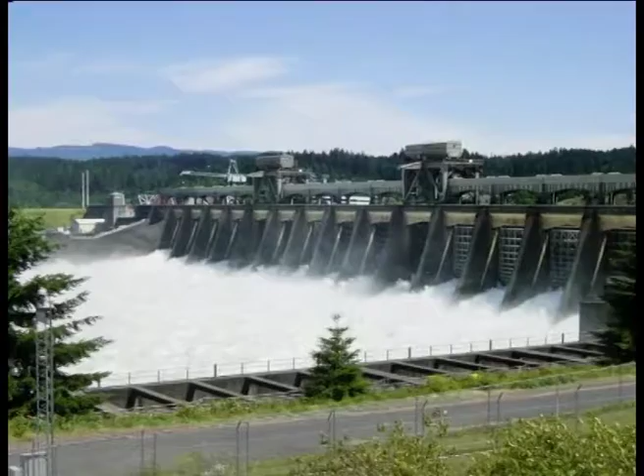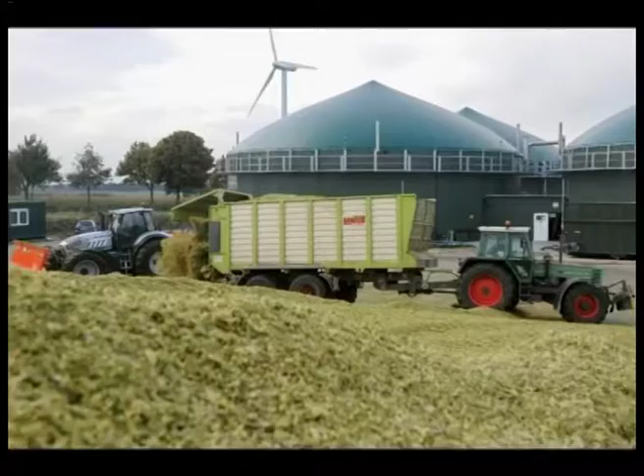The renewable sources are those which will be available for our human consumption again and again. The energy derived from water as hydroelectric power, sun as solar energy and wind energy are the renewable energy sources. It also includes now the bioenergy sources today.

The non-renewable energy sources are those which are permanently consumed for generating energy and need further supply. Fossil fuels like coal, oil and gas, fissionable materials for nuclear power generation, and geothermal energy sources come under this category. Natural energy sources and resources are very important aspects to be studied.

In this lesson, the kinds of natural energy resources used by us are going to be seen. The energy resources are classified into the following five categories: energy from fossil fuels, energy from sun and wind, energy from water, energy from biomass, and energy from nuclear and other sources.

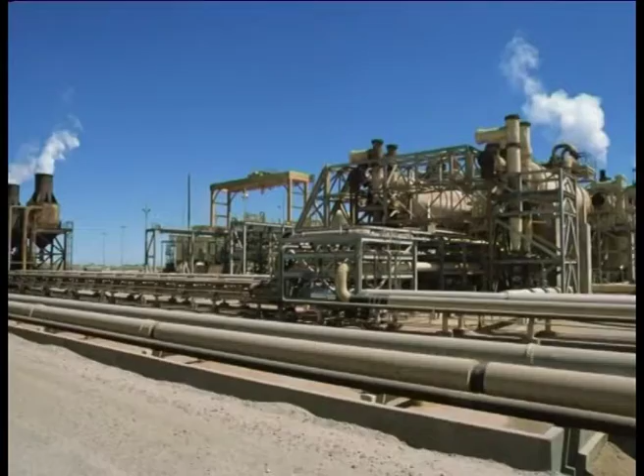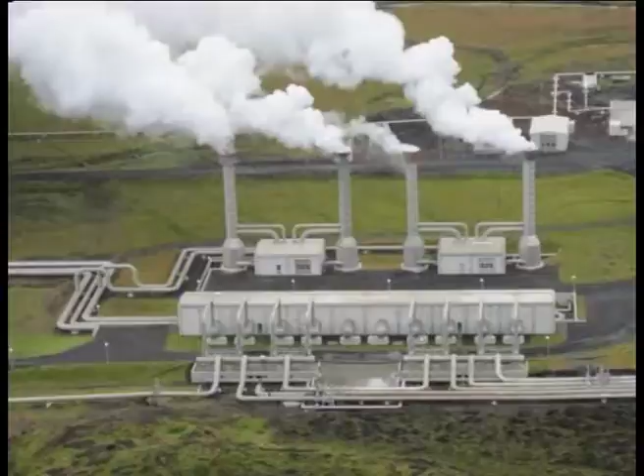If we look at the global energy consumption, 37% of the energy is consumed from petroleum resources, 24% is derived from natural gas, 20.9% is derived from coal, 8.8% is derived from uranium, 4.1% is derived from biomass, 2.8% is derived from hydropower, 0.4% is derived from geothermal sources, 0.7% is derived from wind, and only 0.1% is derived from solar and other sources.

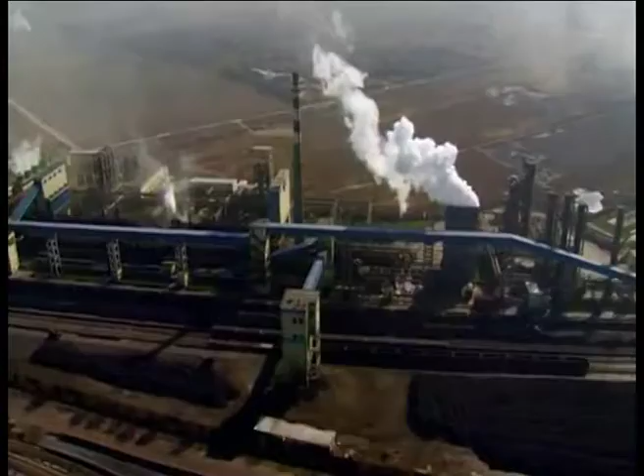Almost 91.7% is obtained through non-renewable sources and only 8.3% is derived from renewable energy sources.

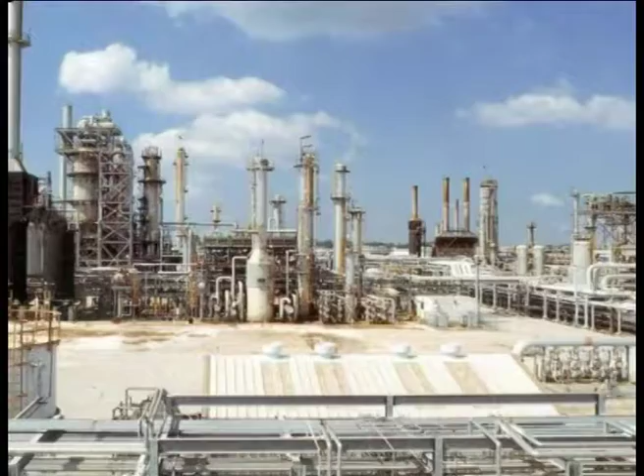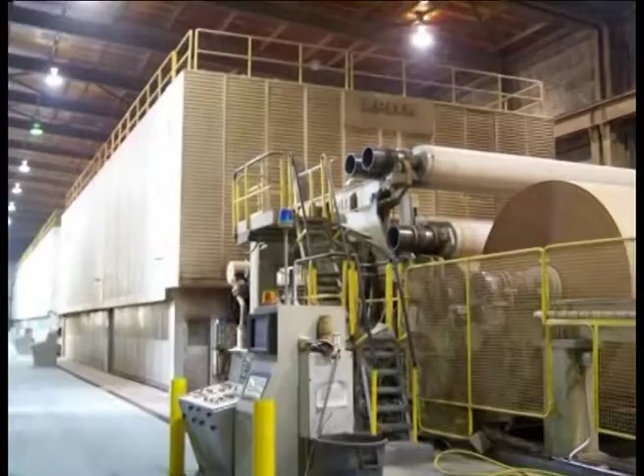If we see the energy used by type of industry, almost 32% is used in petroleum refining industries, 24% is consumed by chemical industries, 11% is used by paper industries, 8% is used by metal industries, and all other industries put together use about 25% of the energy in the world.

The energy resources derived from coal, oil and natural gas are considered energy from fossil fuels because they have been explored from the fossilized remains of prehistoric plants and animals. Coal is an altered residue of plants and trees of older forests which have been buried under sediments, and they are subjected to a set of geological processes and transformations.

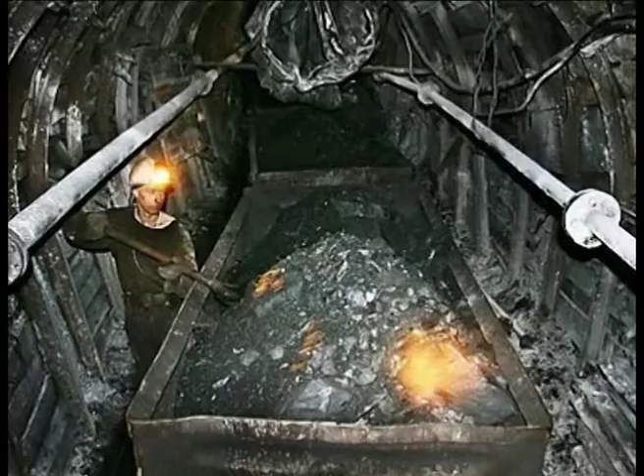Coal is burned to create heat to turn water into steam. The steam is then used to rotate the turbines which will rotate the dynamos to generate electricity. It is also converted into another usable form of energy called coke, a charcoal-like solid which is essentially used as a raw material in the production of iron and steel industries. Coal occurs in sedimentary basins as coal seams or layers.

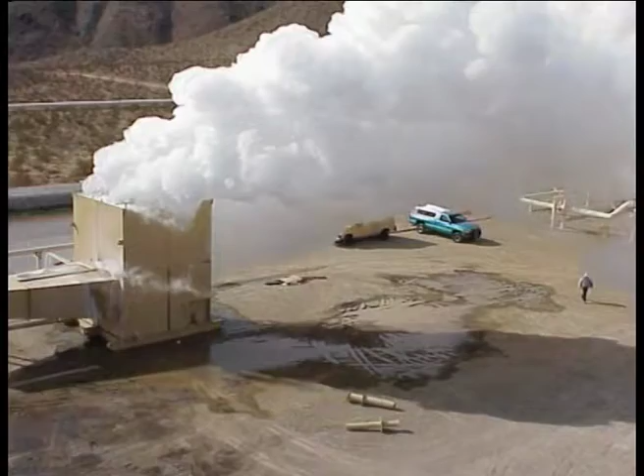Coal is mainly used in thermal power plants. The production of thermal energy depends on the ash content of the coal used. Higher the ash content, lower the efficiency of the boilers and furnaces. The use of coal also generates solid waste and ashes. For every megawatt of energy produced by a thermal plant, about 1 acre of land is needed to dump the wastes.

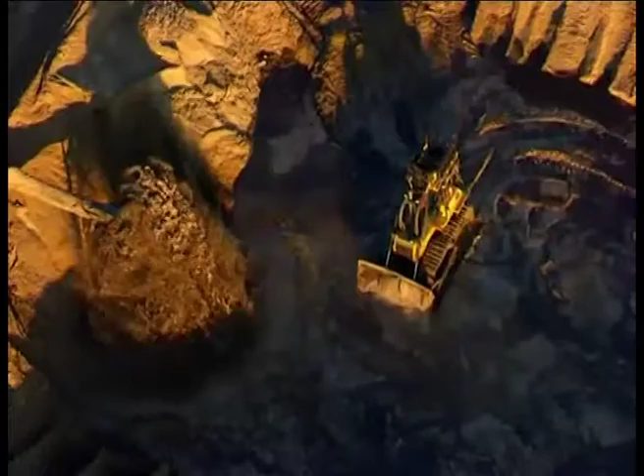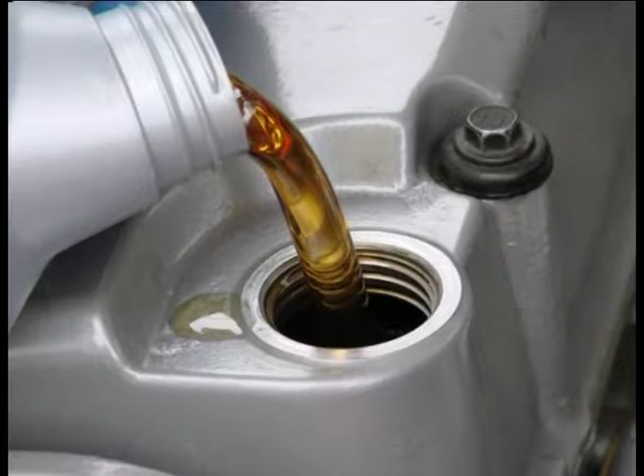Coal-based thermal plants pollute the atmosphere by gaseous emissions of sulfur dioxide and nitrogen oxide. They also produce tremendous amounts of solid waste, fly ash and bottom ash. Coal is a non-renewable form of energy, the use of which is to be done very economically. The next major source of energy is derived from oil. The oil that is derived from rocks is called rock oil or petroleum.

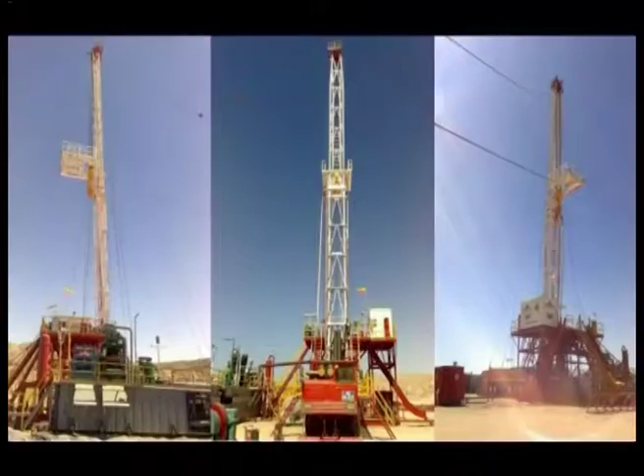Petro means rock, oleum means oil. Petroleum furnishes about 40% of the commercial energy used in the world. It provides most of the energy used for transportation and other activities of the population. In general, petroleum and natural gas are hydrocarbons.

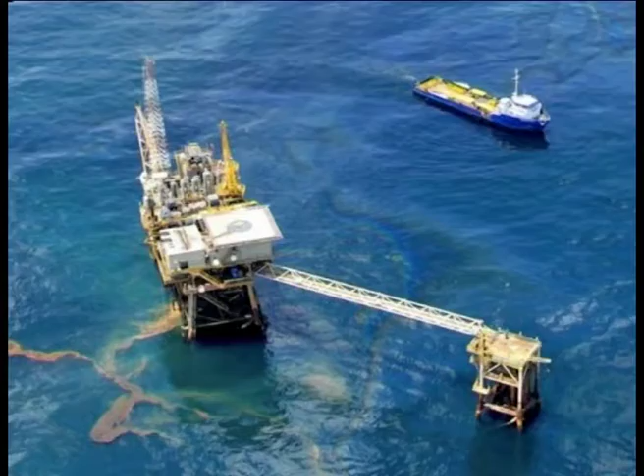They are fossil fuels formed from organic materials that escaped complete decomposition after burial. Petroleum is a complex mixture of hydrocarbons containing nitrogen, sulfur and oxygen. The major source for oil and gas is the fine grained, organic rich sediments buried to a depth of 500 meters or below the stagnant oceanic waters. Like coal, oil also contains some impurities that can cause air pollution, but refineries can remove many of these pollutants when they process the petroleum.

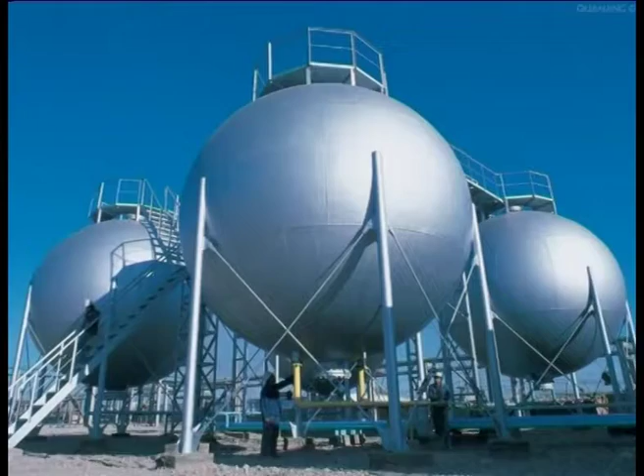Natural gas is the most convenient fossil fuel. It causes little or no air pollution. Natural gas is a clean source of energy because it is refined naturally during its formation within the earth and does not require further refining. In addition, it can be compressed into a liquid and transported long distances through pipelines. Natural gas is used for domestic and industrial applications.

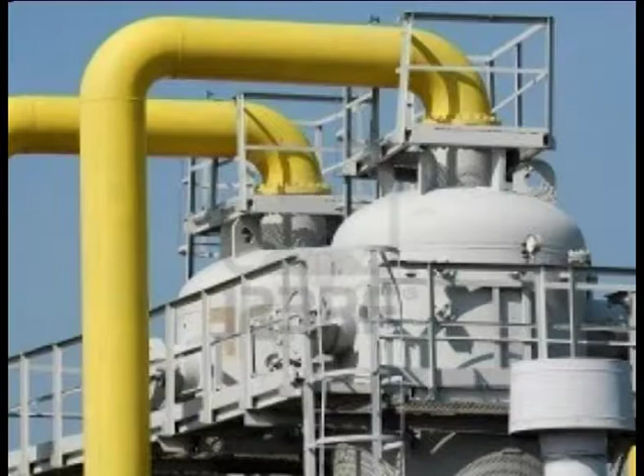The consumption rating for different sectors of natural gas are: for manufacturing fertilizers about 36% is used, for power generation about 27% is used, for industrial sectors about 8% is used, and for the extraction of liquefied petroleum gas or cooking gas, the rest is used.

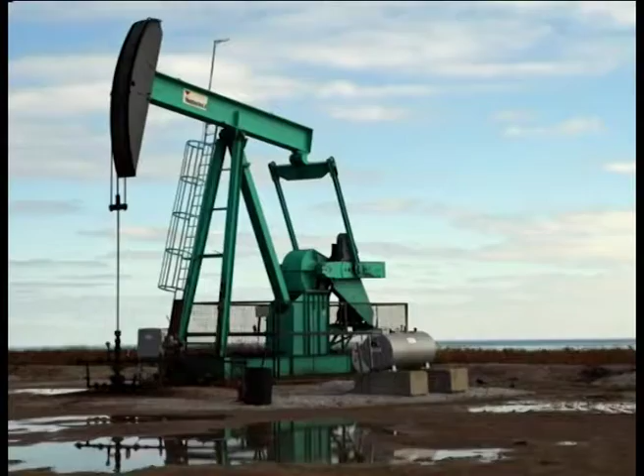India has significant amounts of oil and natural gas resources. There are few revenue generating companies in the oil and natural gas productions in India.

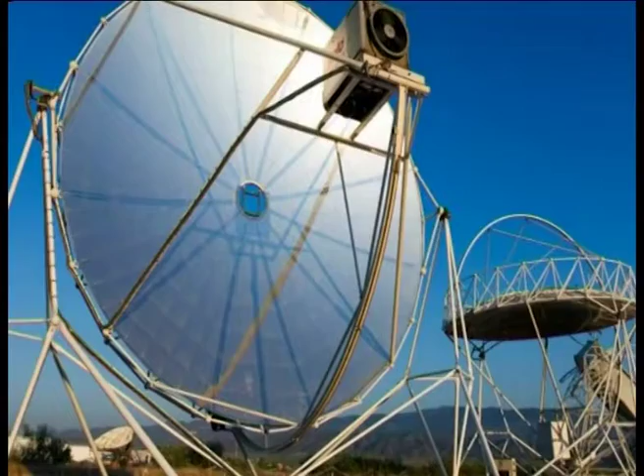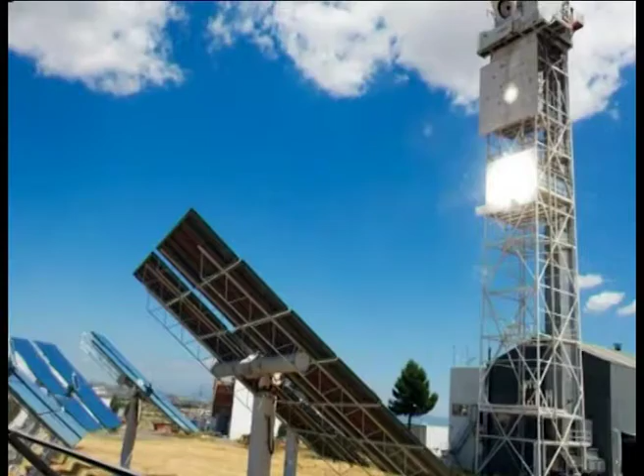The energy received from the sun's electromagnetic radiation is called solar energy. It is also used to produce electric power. This is a non-conventional and renewable energy source. Solar power is one of the cleanest forms of energy. It does not generate any greenhouse gases or other pollutants.

It uses no water and produces no waste. It does not contribute to global climatic issues. Solar power will become an important part of our energy for the future.

There are two methods through which sunlight can be converted into electrical power: by using photovoltaic conversion or solar thermal conversion. There are also many ways to convert the sun's energy into heat and electricity.

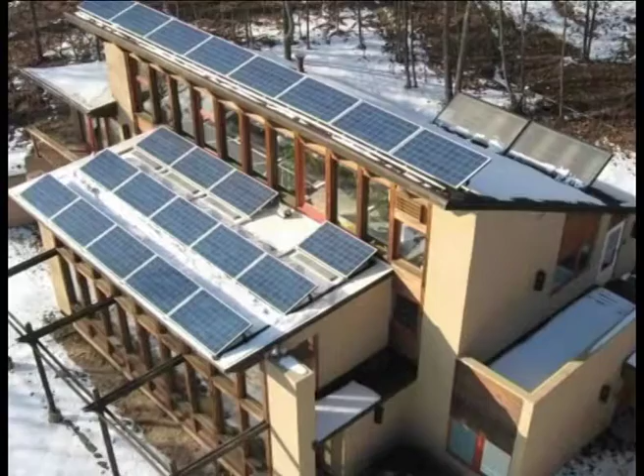Passive solar energy is one type. This type uses sunlight for energy without the use of active mechanical systems. It ensures that buildings make the most use of the sun's radiation to regulate both light and temperature requirements.

Solar thermal collectors are the second type. This uses the solar radiation falling on them to heat the tap water. They can also serve for space heating.

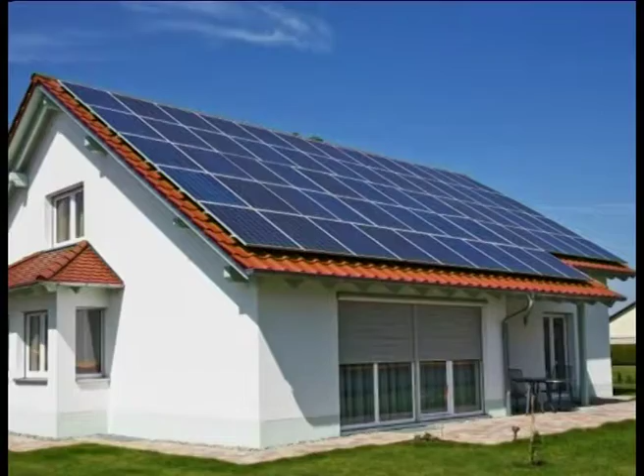Different types of photovoltaic modules are used to convert the solar radiation directly into electricity. Such modules are now used in buildings, especially on the rooftops. They are also used as roof tiles.

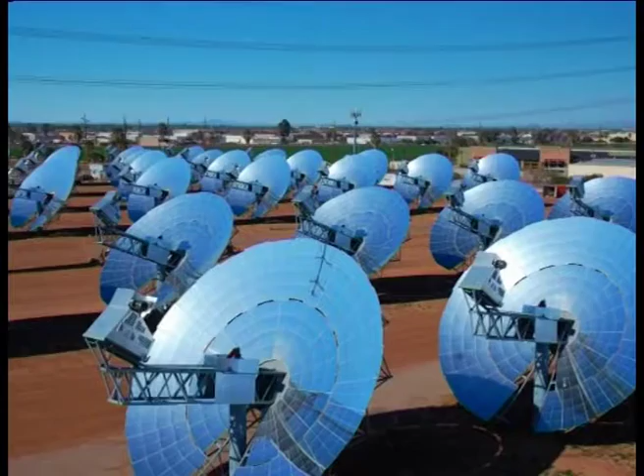Different types of solar thermal power plants are also using solar heat by concentrating the solar radiation. They use mirrors which focus on the solar power tower or by means of parabolic troughs, and heat the water and convey the steam to a turbine which can generate power.

In some places, a simple mirror based system is used to save gas, kerosene or wood through solar cooking. It is reported that the solar energy falling on the earth every 29 seconds is equivalent to the human energy requirement for the entire day. That is a very important point to be noted by us.

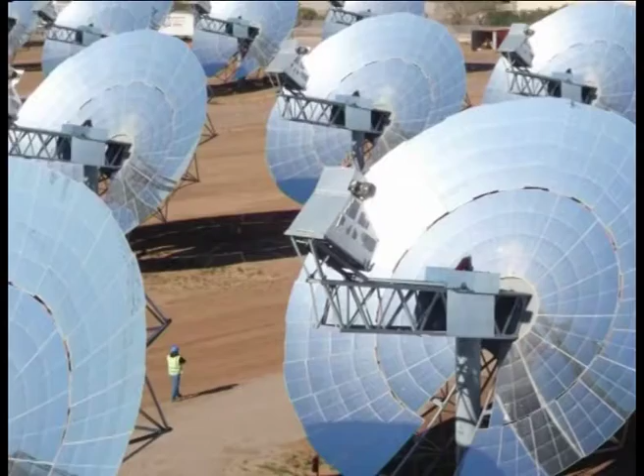Solar energy comes from the sun and it is plentiful, but the distribution is very sparse. It must be collected and concentrated to produce usable power. This requires some special devices. Hence, harnessing of solar energy is an expensive affair.

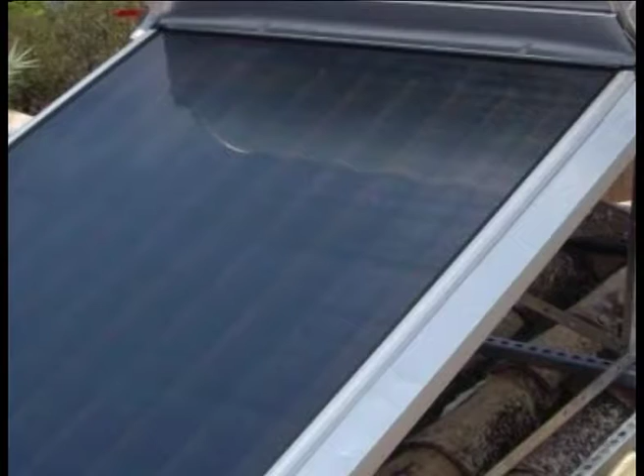A typical solar water heater consists of a coil of copper pipe brazed to a blackened metal base. This assembly is covered by a transparent glass plate or a plastic sheet. The water which is passed through the coil gets heated up by the radiation. A very high amount of heat is trapped in this process during summer months.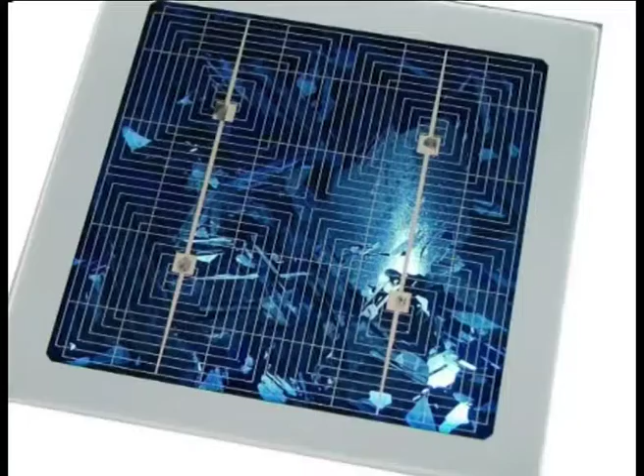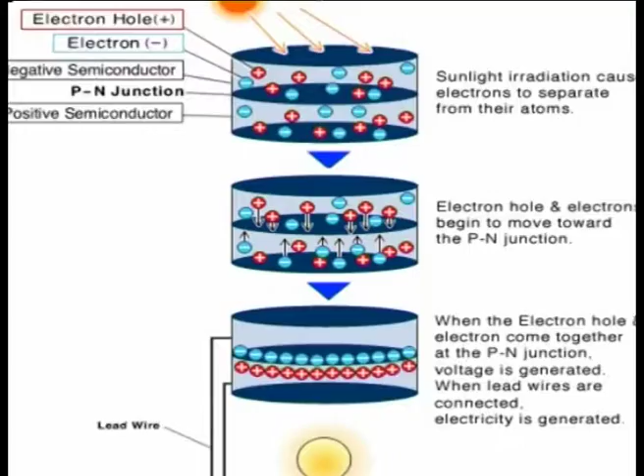Solar energy is also caught to provide power using solar cells. Solar cells are devices made from crystals of silicon to produce electricity from sunlight. They are called photovoltaic cells.

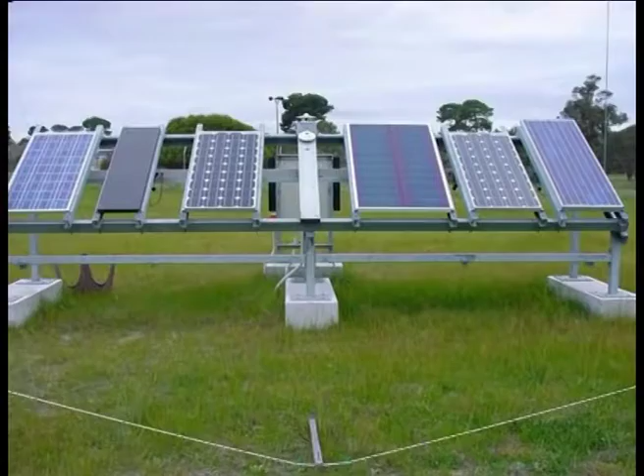Research continues on the application of solar energy for pumping up water, use of solar energy for refrigeration, use of solar ponds, and temperature control in buildings.

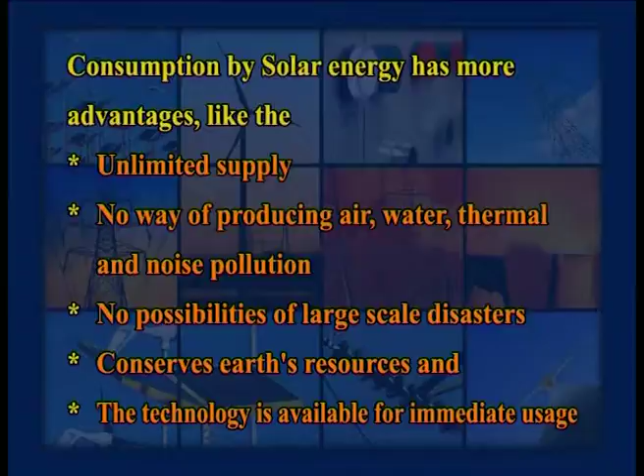Consumption of solar energy has many more advantages, like unlimited power supply will be available, no way of producing air, water, thermal and noise pollution, no possibilities of large scale disasters in solar energy. It conserves earth's resources and the technology is available for immediate usage. The major disadvantage is the expenditure involved in establishing the photovoltaic plants.

Solar cells are also very expensive. They cannot be completely used to replace the conventional fuels in some places or in some processes.

Next comes wind energy. The global wind energy potential is also very huge. It can be harvested everywhere. We get a good flow of wind in the valleys, on the mountains, at or near the seas. In India, China, European Union and the United States of America, these are all the major wind energy producing countries in the world. The rapid depletion of fossil fuels and the increase in environmental pollution call for an efficient use of other energy sources and to identify alternative energy sources also.

Wind is a powerful agent for providing power. It is the best renewable energy source available on the earth. Wind energy can be harnessed very easily. The blow of wind is allowed to rotate the blades of a windmill which is coupled to a turbine. This drives the power generator to produce electricity.

There are some merits and demerits in using wind energy. The generation period is very low, that is only 5 months of a year we can produce wind energy. This is because of the seasonal availability of a reasonably useful wind. Power generation starts immediately after the commissioning of the plants. Power is cost free, generation is cheaper, but the recurring cost is also very less. The installation cost is very heavy. The maintenance of the machinery is also very expensive.

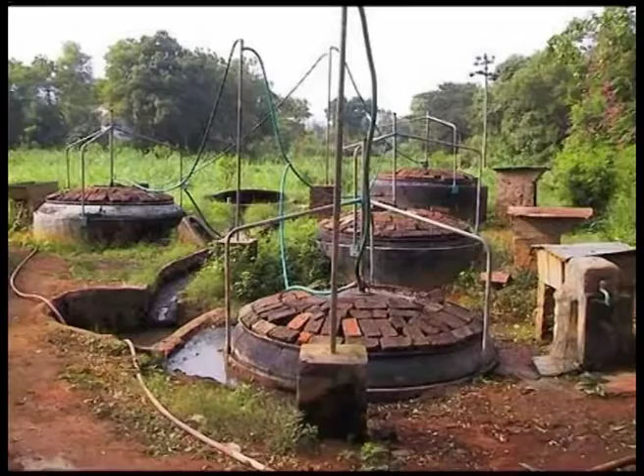Biogas is the methane gas produced or released from organic waste like sewage, garbage, manure or crop residues. These are decomposed substances in the absence of air. This is similar to natural gas in origin.

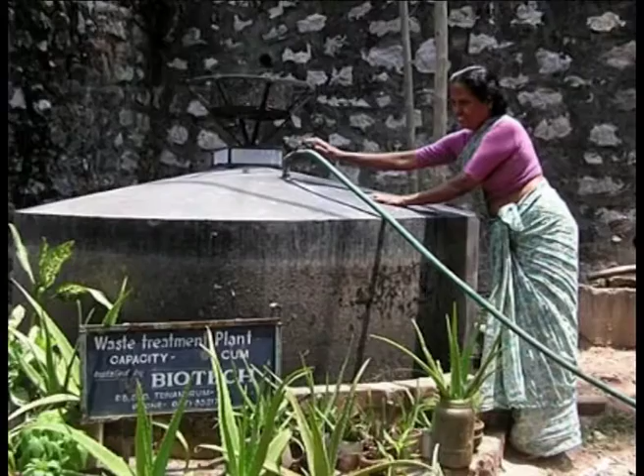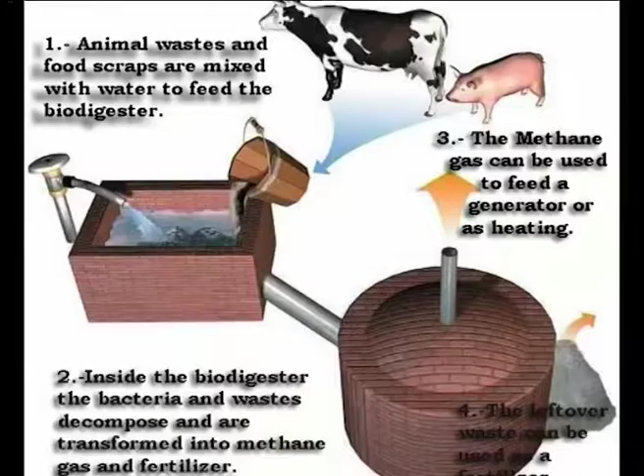Biogas can be collected using a container filled with the waste and closed at the top with a tap for trapping the gas. The wastes are mostly animal excreta or dung which are allowed to decay and decompose naturally inside the container. After producing the gas, the used up materials can be used as a high quality organic manure in the croplands or agricultural lands.

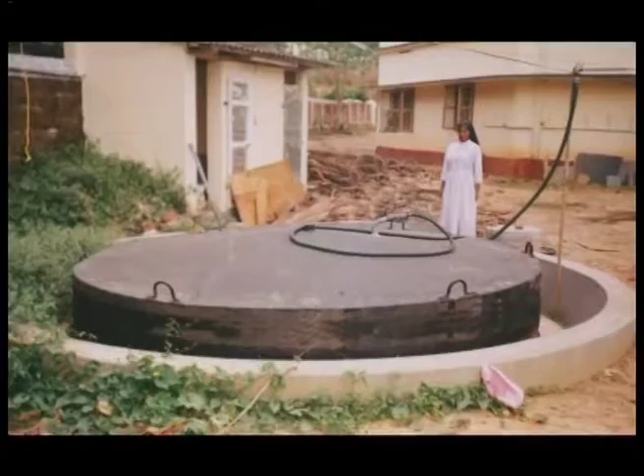Community biogas plants, industrial biogas plants, night soil biogas plants, family size biogas plants and improved chulas are some of the bioenergy sources employed and are under operational conditions in India and also in several other parts of the world.

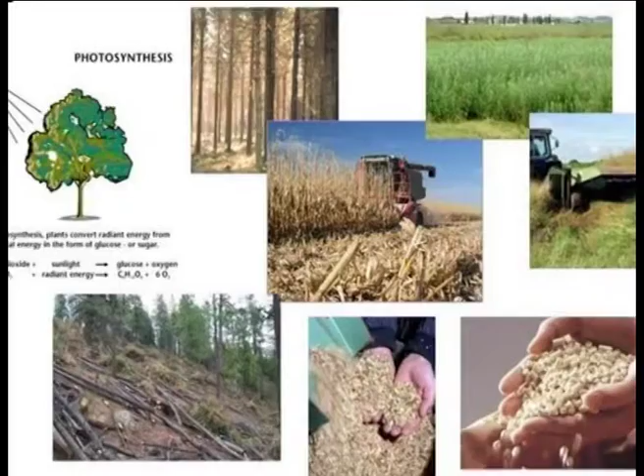Biomass fuel is the common name given to all forms of fuel generating organic remains. These organic matter can be burned directly or indirectly as fuel. A well-known popular biomass is the fuel wood. Wood was used as a major source of energy in several parts of the world for several centuries. Firewood is the best known biomass fuel. Cow dung or cattle dung is burnt for cooking purposes.

The distillation of biomass is done to produce alcohol for fuel. There are three major sources: forest products, unused agricultural products and urban waste. All of them can be used as biomass to produce fuel energy.

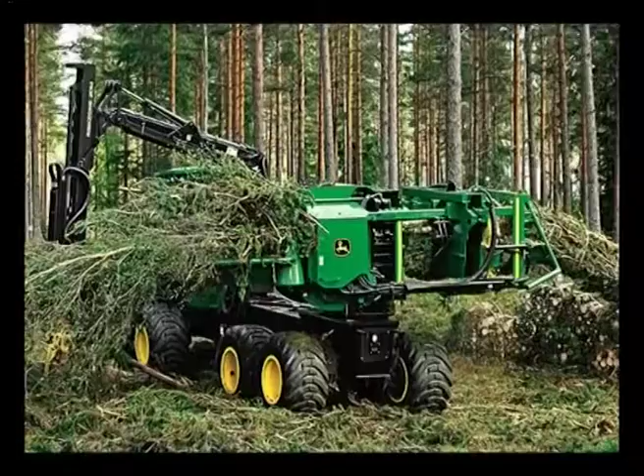The main advantage is that biomass under several conditions can be recycled. The main disadvantage is the requirement of energy for processing the biomass into a convenient form of energy, so one energy is required to produce another energy. Biomass energy is available locally, that is an advantage. Sugarcane farms and sugar production plants can use the straw and the dust to generate power. The main disadvantage is that the consumption of biomass fuel can produce air pollution, smokes, ashes and sometimes degrade the land areas.

Liquid biofuels are yet another major source of energy production. Ethanol and biodiesel are the major liquid biofuels. Ethanol is an alcohol fuel made from the sugars found in grains such as corn, sorghum and barley, potato skins, rice, sugarcane, sugar beets, yard clippings, barks and switch grasses.

Biodiesel is a fuel made from vegetable oils, fats or greases such as recycled restaurant greases. Biodiesel fuel can be used in diesel engines without changing them. It is the fastest growing alternative fuel in places like the United States.

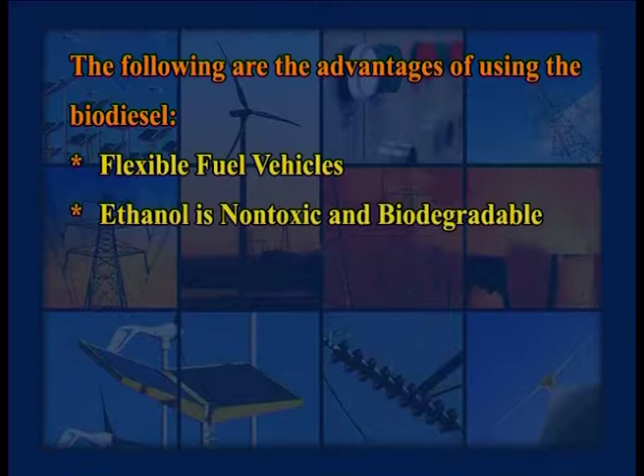The following are the advantages of using biodiesel: flexible fuel vehicles, ethanol is non-toxic and biodegradable, ethanol can reduce pollution, biodiesel burns much cleaner than diesel, and biodiesel use may reduce greenhouse gas emissions.

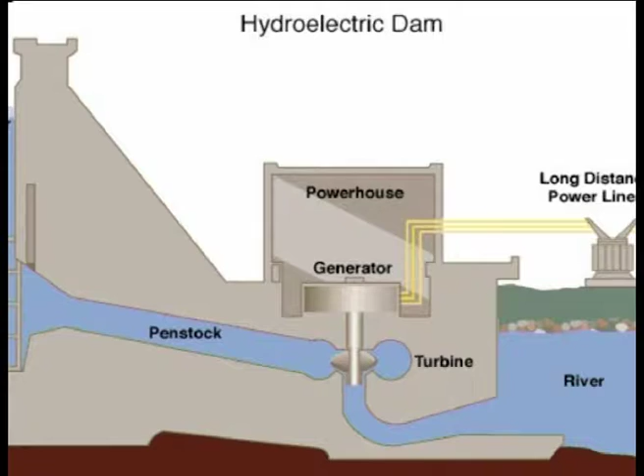Hydroelectric power generation is a major source of energy over the globe for several decades. Water power furnishes about 7% of the world's commercial energy. Water costs nothing and cannot be used up, and it supplies energy without pollution. However, water power projects require a dam or a reservoir to be constructed, which are very expensive. A hydroelectric power plant can operate only where water flows from a higher altitude to a lower altitude.

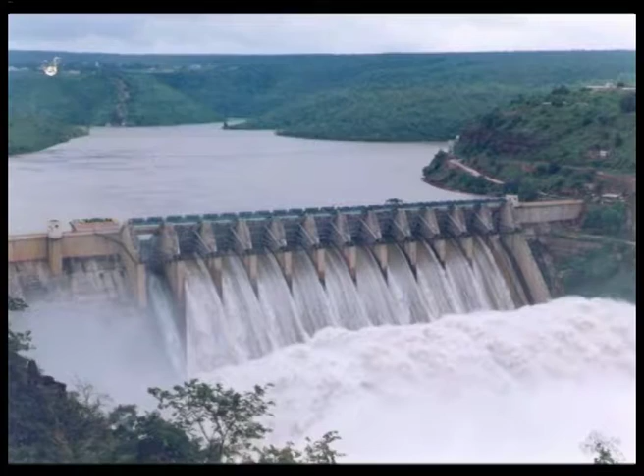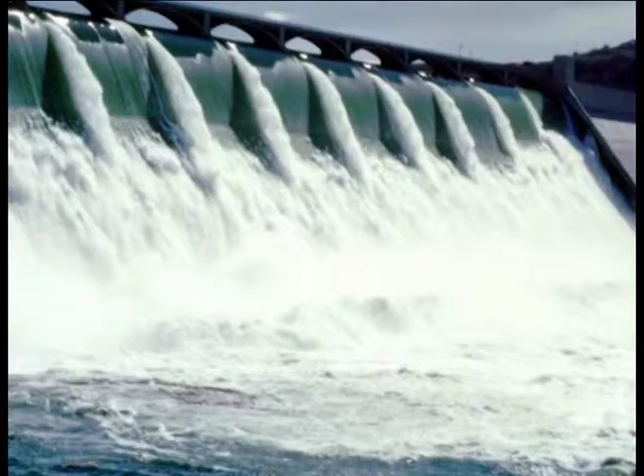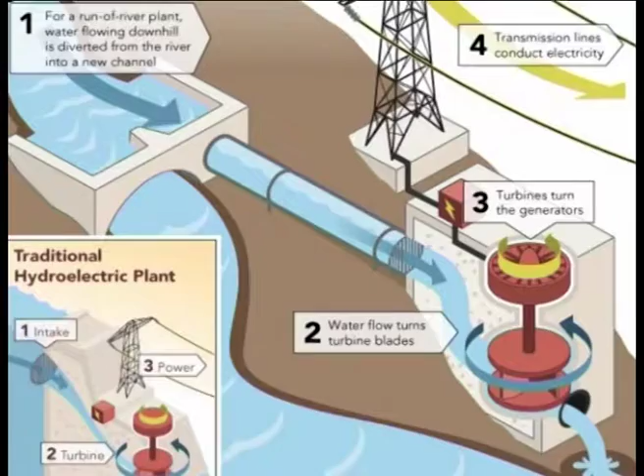In several hilly and mountainous terrain, establishments of hydroelectric power plants on the perennial rivers has contributed to the major electricity generation usage in many countries. Hydropower is a renewable energy source. Historically, water wheels were used to generate mechanical energy to run the mills and also the machineries.

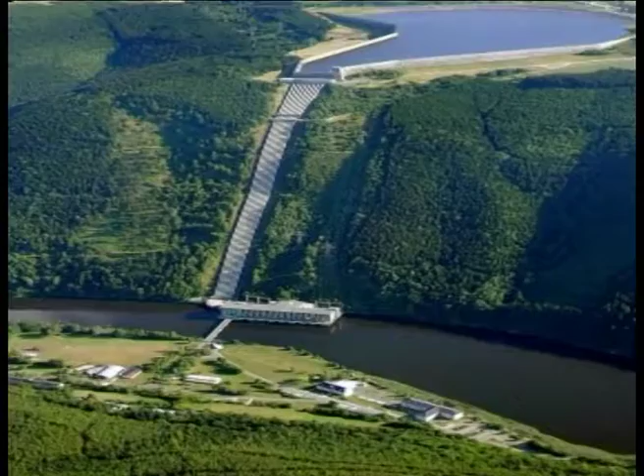Water power is a clean power. It requires no burning of any other fuel. These power generators do not pollute the atmosphere or the hydrosphere. Hydroelectric power is also combined with thermal power plants. With this combination, the thermal power plant can supply power if the hydroelectric power plant is affected by severe drought without water or rainfall. Next comes the tidal power.

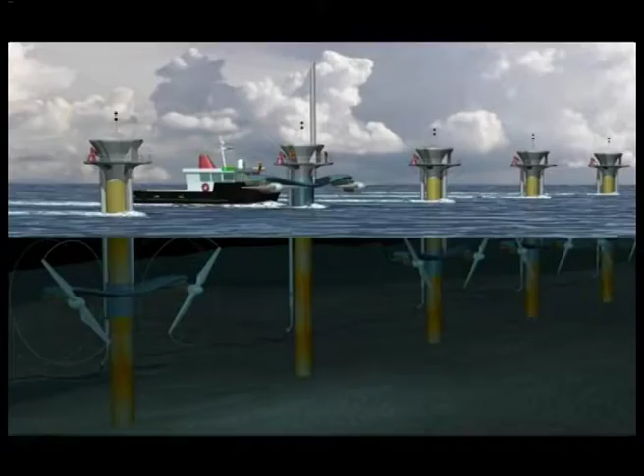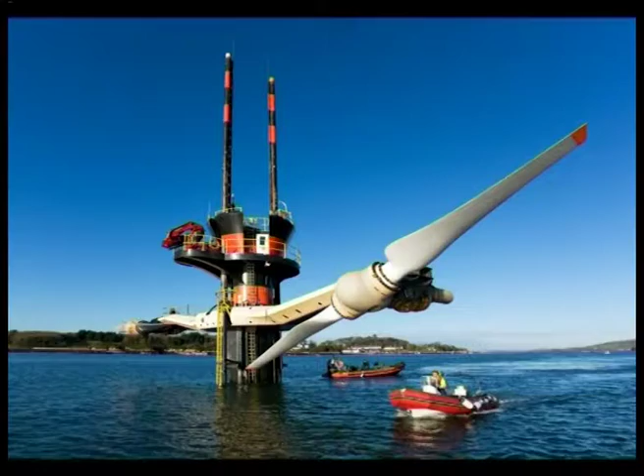Tides and waves can generate enormous energy for consumption. The tides, which are dashing against the shores continuously, can generate the tidal power. Tidal power can be obtained by using a tidal dam built with a turbine. This is more expensive when compared to the hydroelectric power generators.

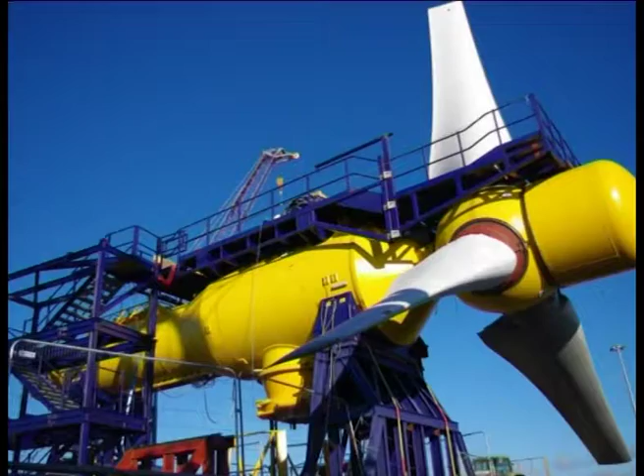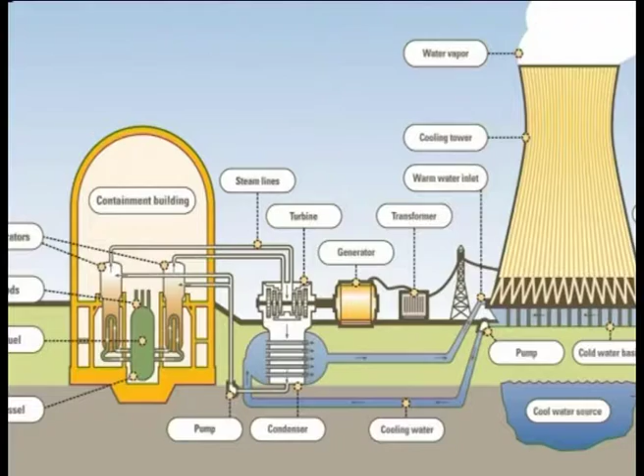Many of the environmentally conscious countries in the world depend on nuclear power for their electricity generation. At present, about 17% of the world's electricity is generated through nuclear sources. Nuclear source is a clean, compact and concentrated energy source. Nuclear power plants are similar to coal plants in that heat is used to produce steam to drive a turbine which can generate electricity. But the basic difference between them is the atomic fission instead of chemical combustion.

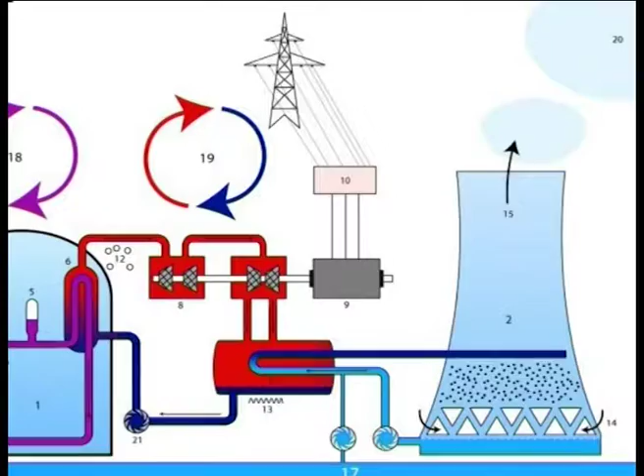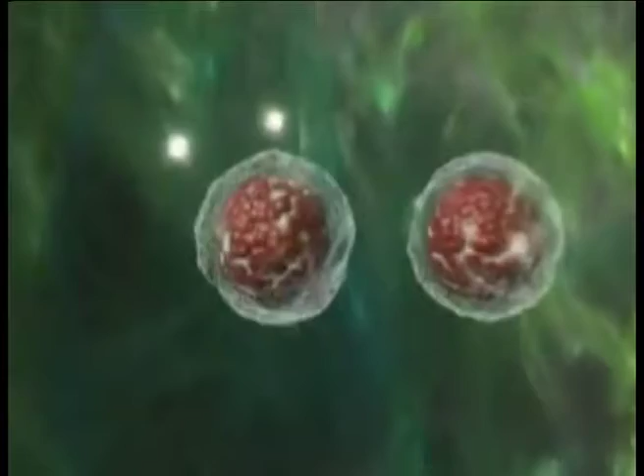A nuclear reactor requires a fuel substance whose nuclei can undergo fission. Such substances are called fissionable substances. Uranium 235 and plutonium 239 are the widely used nuclear fuel energy sources. In addition to the fuel, reactors require neutrons. These are the stimulators for chain reactions to happen. Safety, design and operation of reactors depend on the way by which these neutrons are managed in the power plants or reactor plants. Nuclear reactors are classified based on the fuel, the coolant and the moderators which are used to support the nuclear chain reactions.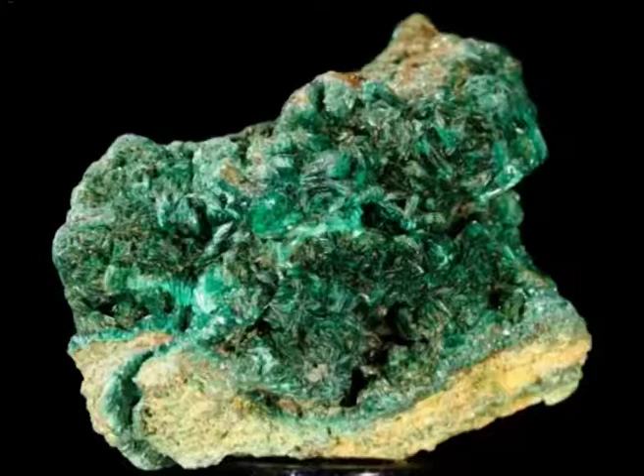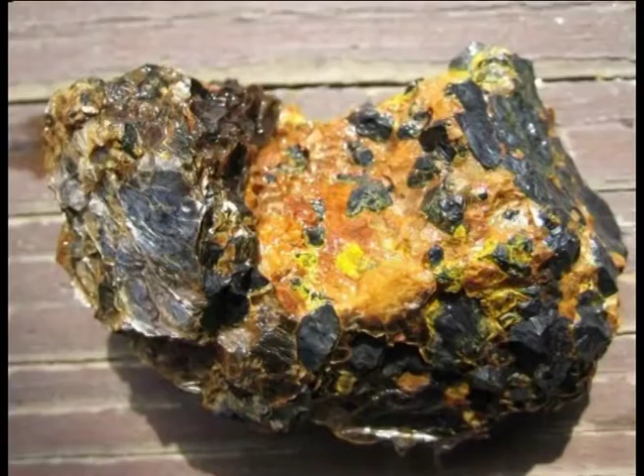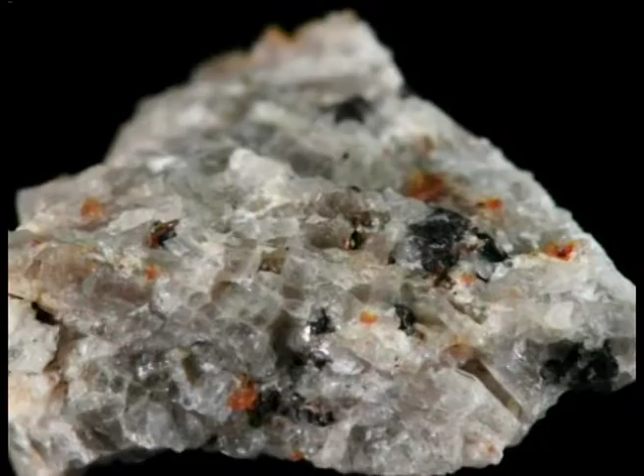The natural concentration of uranium in the Earth's crust is about 2 ppm. Uranium originates in magma. It is concentrated to about 4 ppm in the granitic rocks, pegmatites and other rocks. They occur in a large number of minerals. They are called radioactive minerals. They contain uranium or thorium as an essential part of their chemical composition. Some of them are oxides and complex oxides.

The disposal of nuclear waste, some radioactive liquids, gases will affect the environment very severely. That is why in many places you have seen whenever there is a nuclear reactor established, people go on continuous strikes.

Sources are also available in the form of fuel bundles, which once loaded into the reactor core can provide energy for 1 to 2 years at a stretch before discharging full energy. 1 kg of uranium gives an energy equivalent to 25,000 kg of coal energy produced.

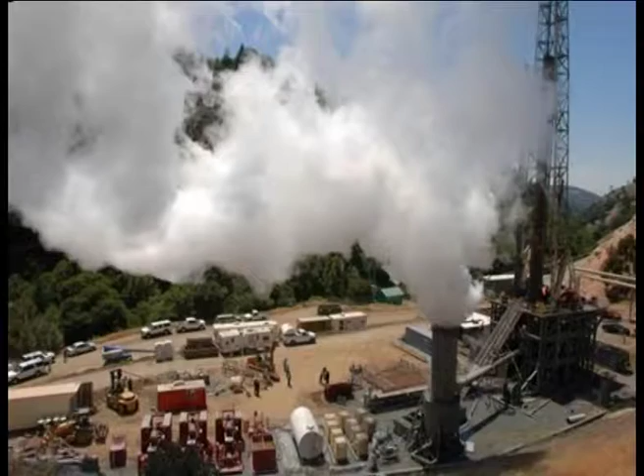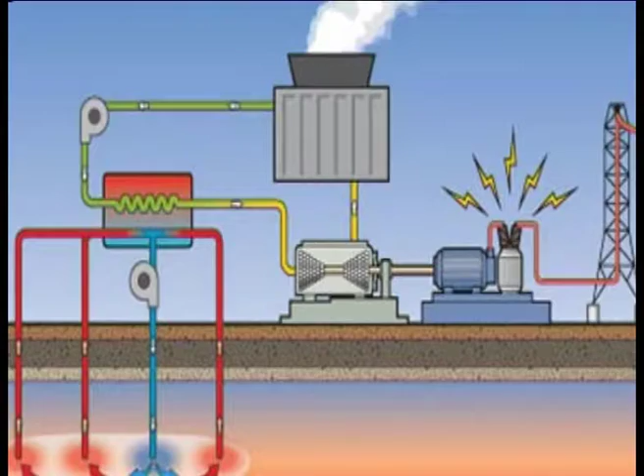The next important natural energy source is geothermal energy. This refers to the heat energy emanating from the Earth's interior, which could be used for heating or for generating electricity. Iceland, Italy, Japan and the Philippines, New Zealand and the United States have developed many geothermal power plants. The method is simple: by installing a pipe into the wells drilled over the regions of geothermal sources and connecting them directly to a turbine which can generate electricity.

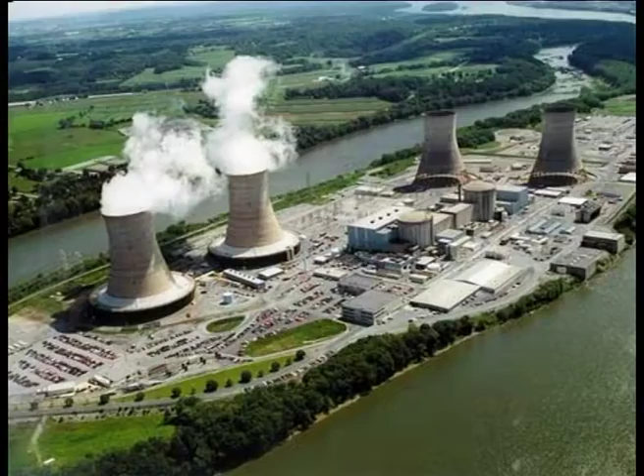Energy is needed for the present and future generations. Earth has various sources of energy. The non-renewable energy depletes very quickly due to the pressure of population. Harnessing the renewable energy is the prerequisite for our future survival. There is a slogan you all might have seen on the boards: energy saved is the energy produced. This is the mantra of the modern society. Let us save the energy and use it appropriately so that the generations can survive without any energy crisis.